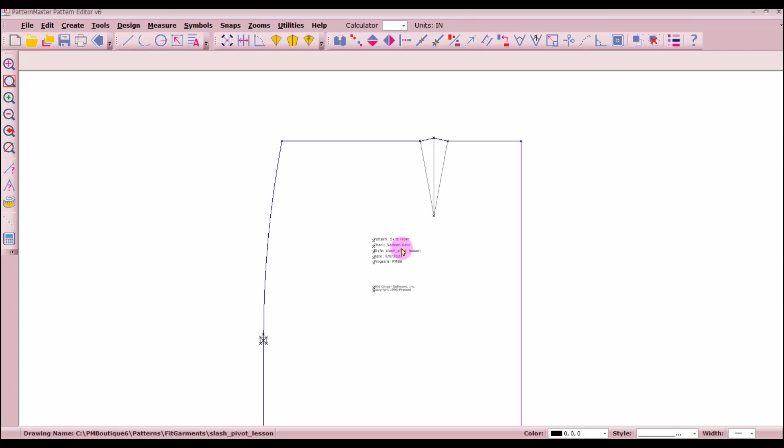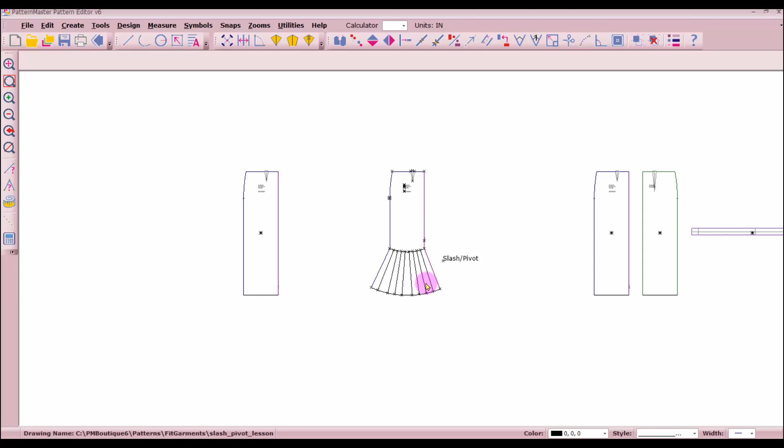Slash and pivot command. This is a midi skirt where I have put a line down at the knee line, and then below the knee I have pivoted, done the slash and pivot command in order to spread this out so it will drape.

So the first thing I need to do here is locate the knee line. On this particular one, it's 24 inches, so I'm going to locate a point 24 inches from the waist. I'll draw a line across from that point, intersect it to the other side, cut the center front at that point, and cut the side seam at that point.

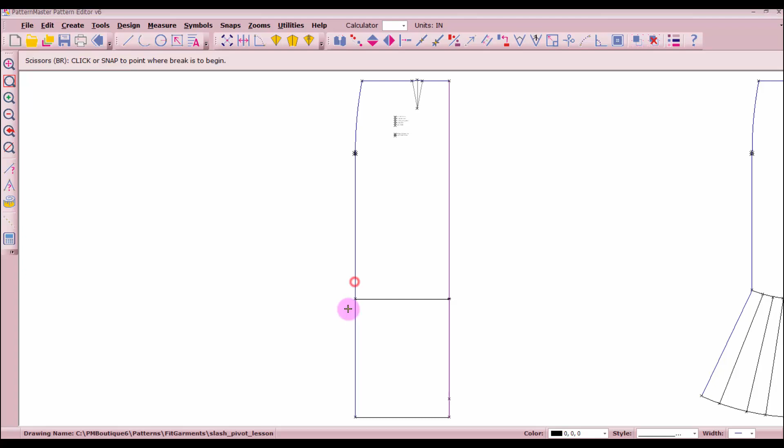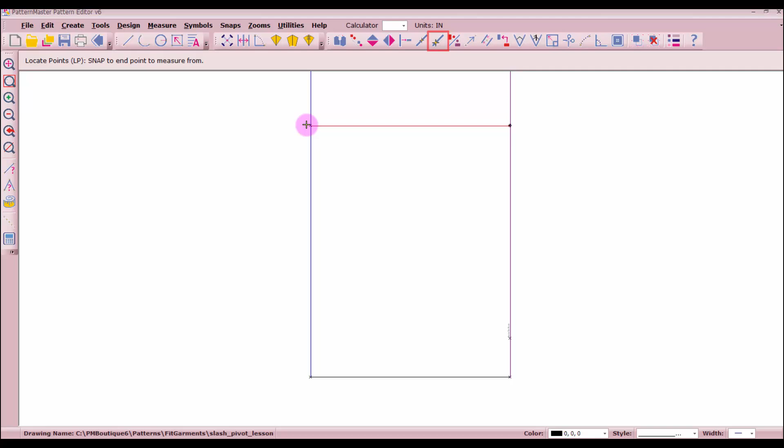The next thing I want to do is place multiple points here. Let me zoom window into here. I'm going to place 8 points along the knee line and along the hem line. Right click at one end of the line, go down here and place 8 points, then come down here and locate 8 points.

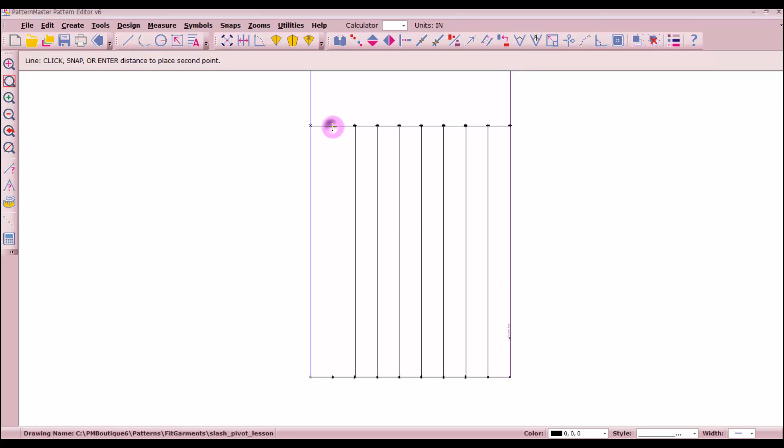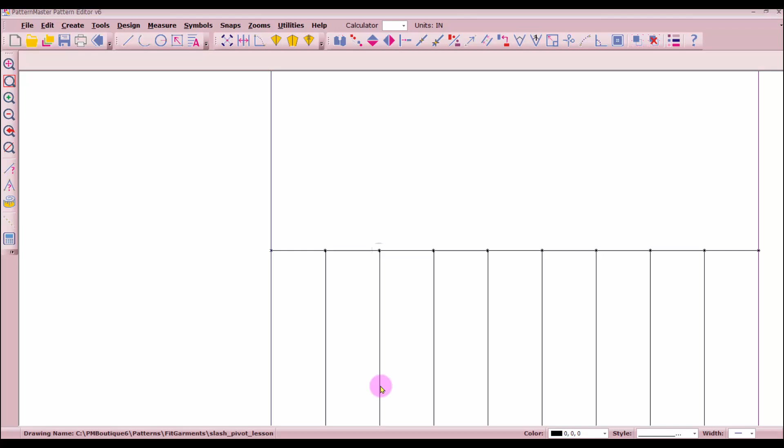Then we're going to draw lines between those points. I just right clicked on each point. Now we need to break this line at each of these points. Click once, double right click. And we need to do the same down here. Click once, double right click.

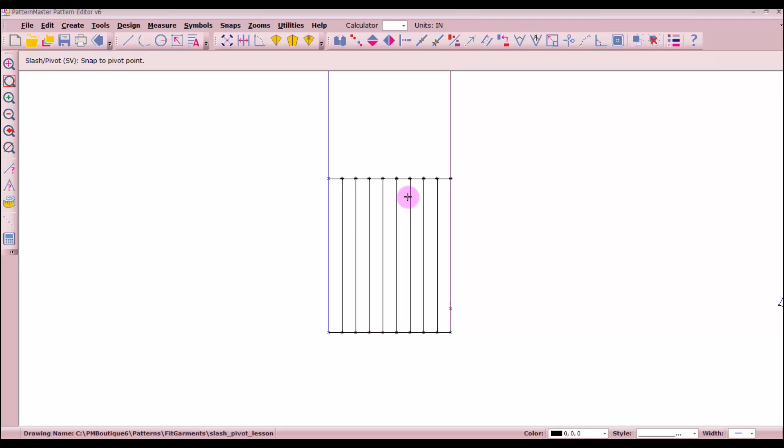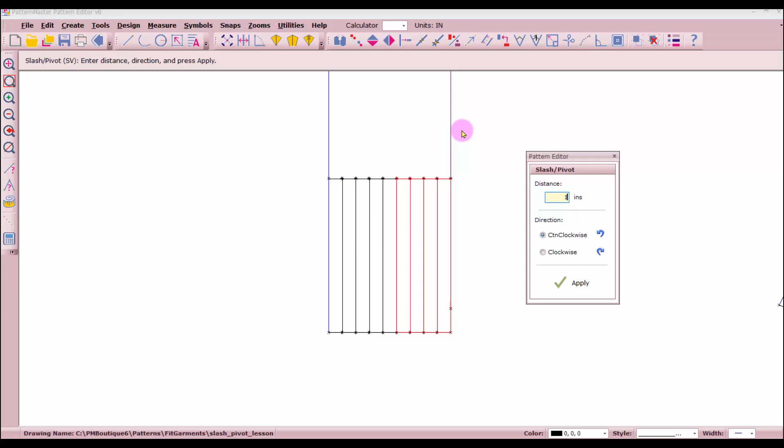And pivot. 1, 2, 3, 4. Right click at the pivot point, right click at the point you want to spread. Drag around all of these. Hit apply. Let's spread them 1 inch, and we're going to rotate to the left, so that's counterclockwise.

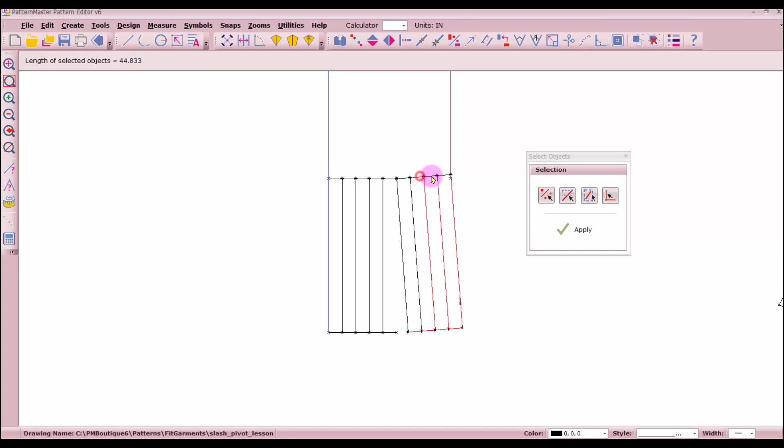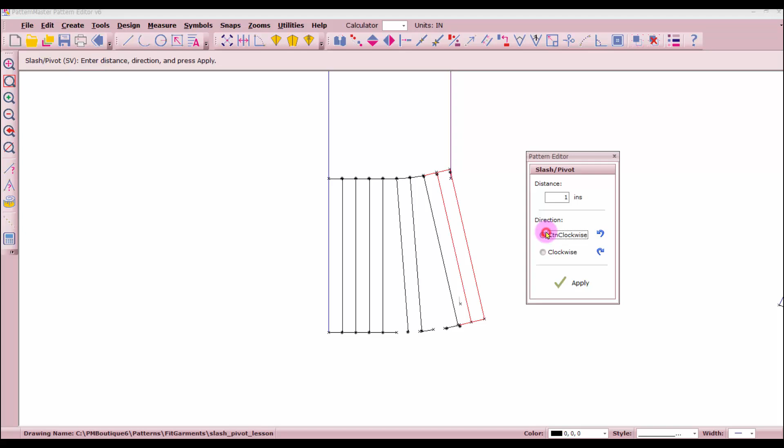Again, 1, 2, 3, third line. 1, 2, 3. And I'm going to select these lines. I'm right clicking at the pivot point and right clicking at the spread point. I'm going to select these two. 1 inch counterclockwise, 1 inch counterclockwise, and then this will be the last one.

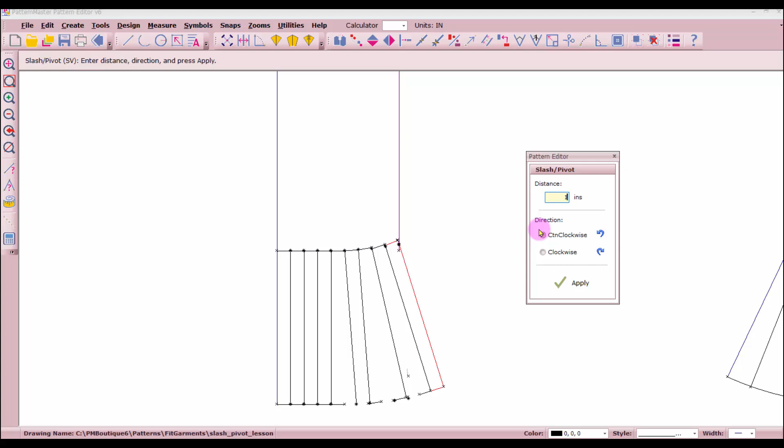Right click, select these. 1 inch counterclockwise. Didn't work, try it again. One inch counterclockwise. And there's that.

Now we need to do this - actually this has been rotated, you can see this space right here. So now we need to do these 4, and we're rotating them clockwise. So this one has been rotated.

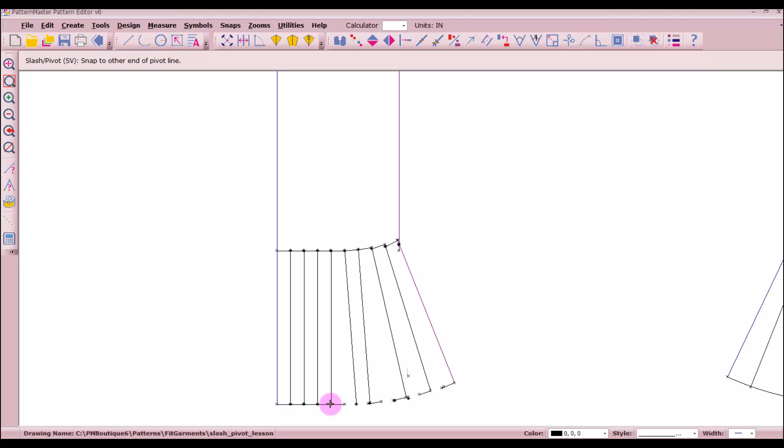We need to start here. Here's the pivot point, and this is the point where we want to spread. I'm going to drag around those, deselect that, and this is 1 inch clockwise.

This for this. Selecting all of these - I'm holding my shift key down to select the multiple objects. 1 inch clockwise. Pivot point, spread point.

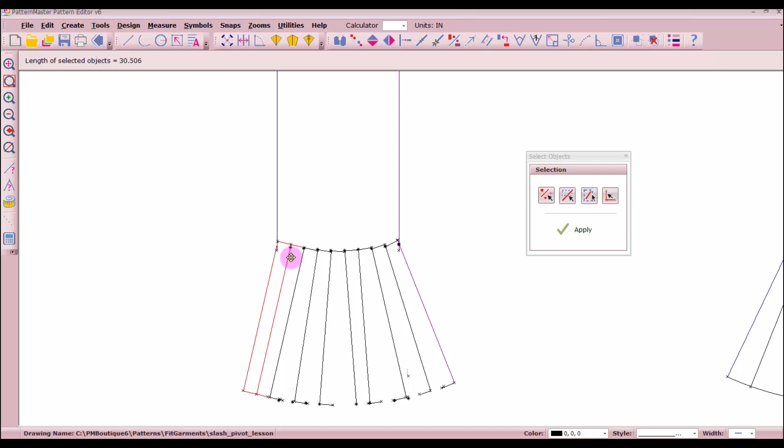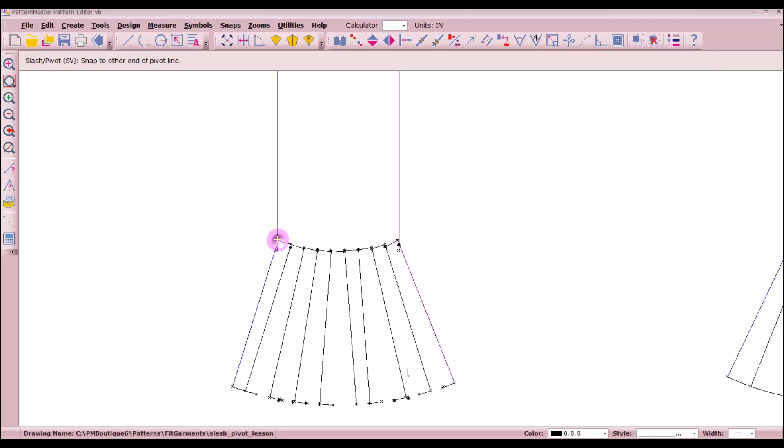Now I will say it really doesn't matter too much if you get these lines up here and down here included in your pivot, because we're going to draw arcs, and we've got other guides that we can use. Then this one is the last one - hold your shift key. 1 inch clockwise. Okay.

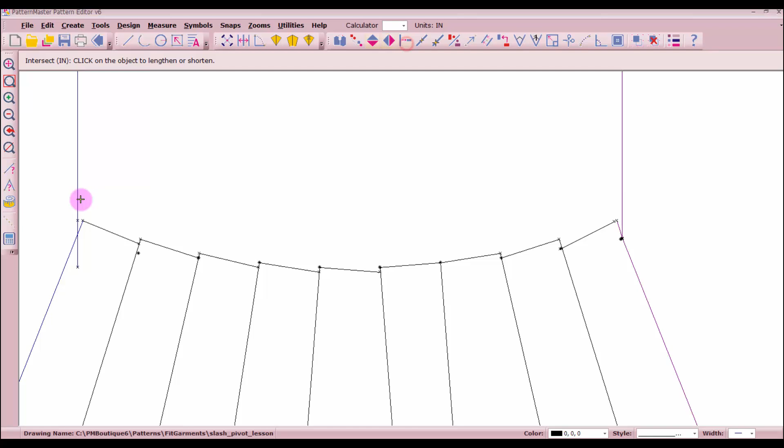Let's do an intersection from here to here, and from here to here. And that can go away. And now let's do an arc, from here to here.

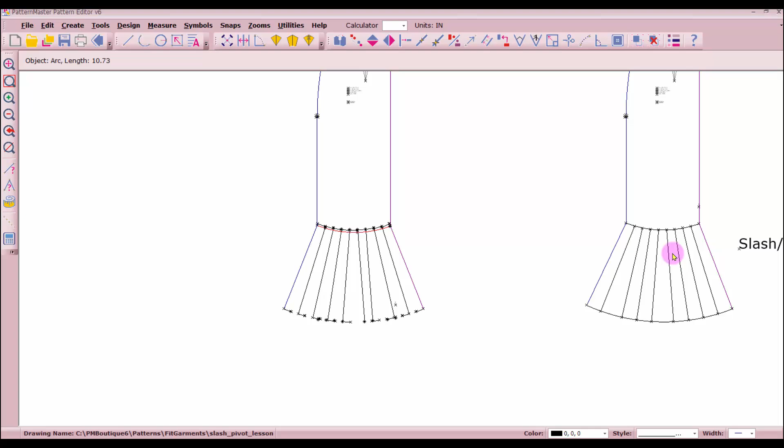I'm just going to kind of - now I know that this needs to be 10.5. No, I need to draw an arc down here first.

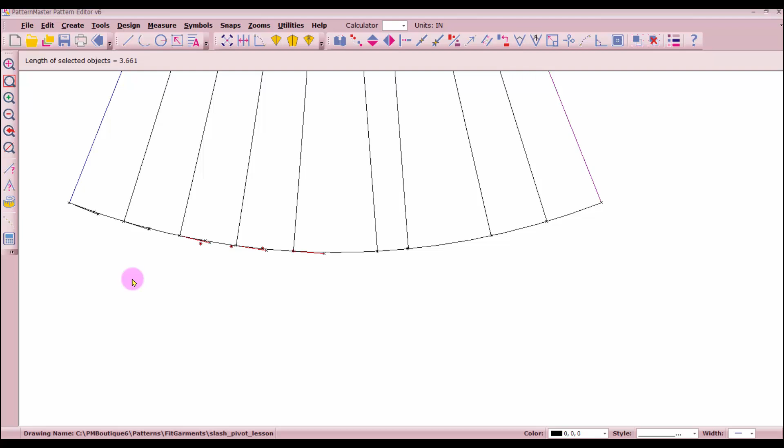Right click, right click. I'm just going to right click down here. I'm going to drag around this and delete. Making sure I don't delete my arc.

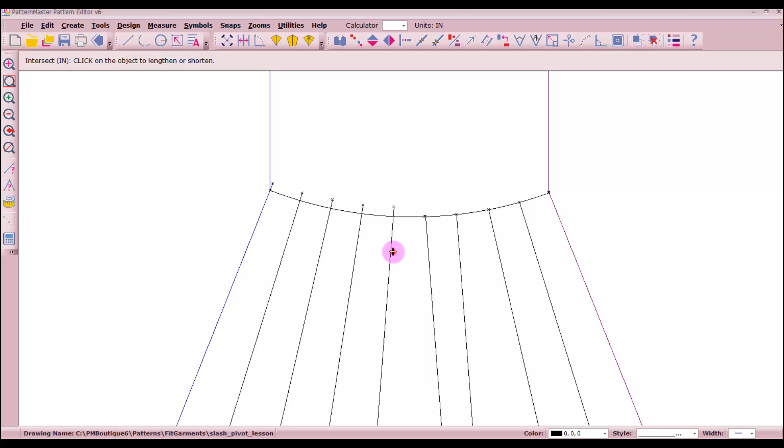Unselect the arc, delete, and then I can just intersect up here, just so we still have lines available for visual inspection. And there we go, so that'll create a nice drape. Now, of course, you won't be able to put the center front on the fold.

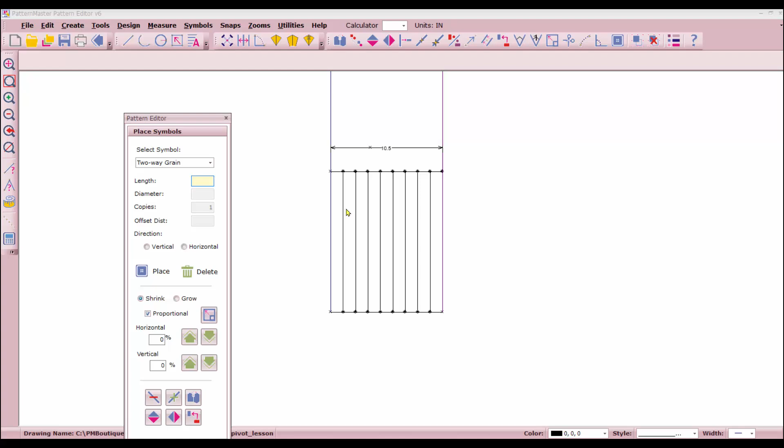Let's look at the grain lines. I'm going to put a two-way grain. We know that this is 10.5 inches, so I'm going to make it 10 inches vertically placed. I need 1, 2, 3, 4, 5, 6, 7, 8 more. So I'm going to zoom window into here.

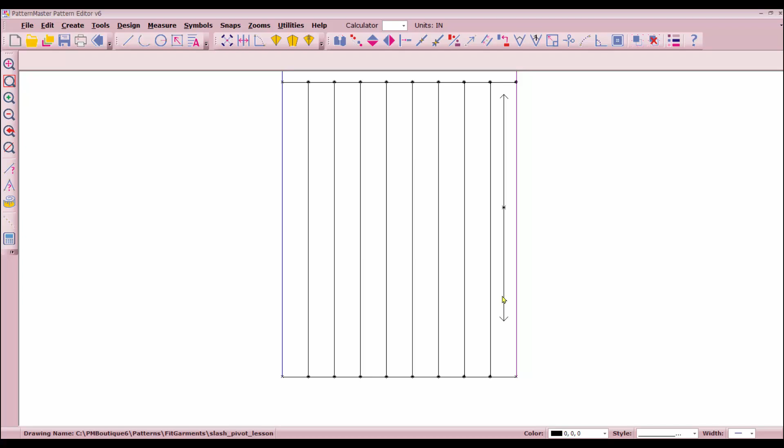Copy, 8 copies, and spread them out. All right, so we've got our grain line.

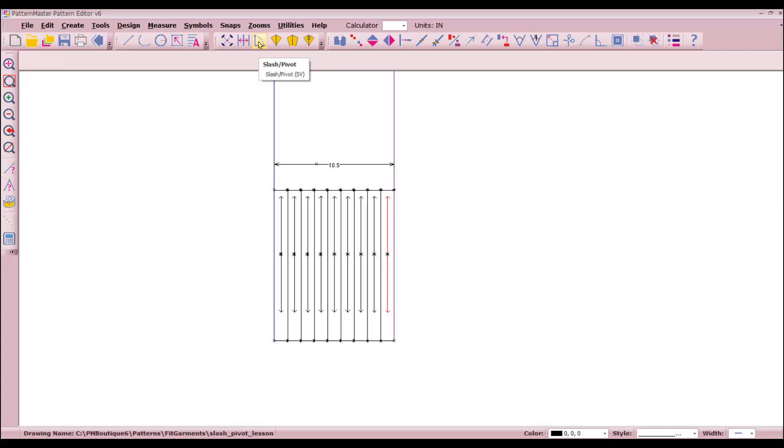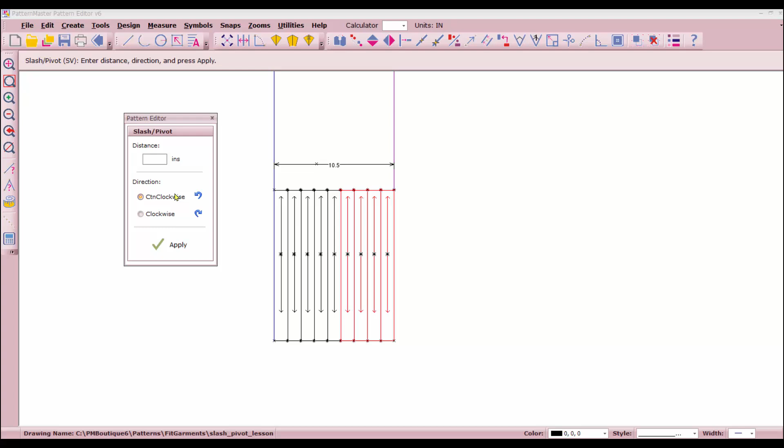Now let's do our slash and pivot with the grain line. So we're going to go from middle, right click at the pivot line, right click below it at the end of the same line. I'm going to drag around all of this - that's including the grain lines. Apply 1 inch counterclockwise.

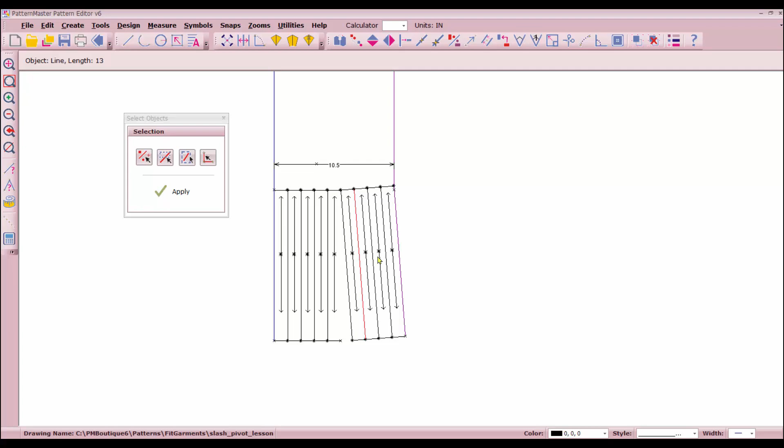This line has been pivoted, so this is our next pivot line. Right-click at the pivot point, right-click on the other end, select that line and everything to its right, including your grain lines. Make sure you're holding your Shift key instead of your Control key. Everything to the right of it.

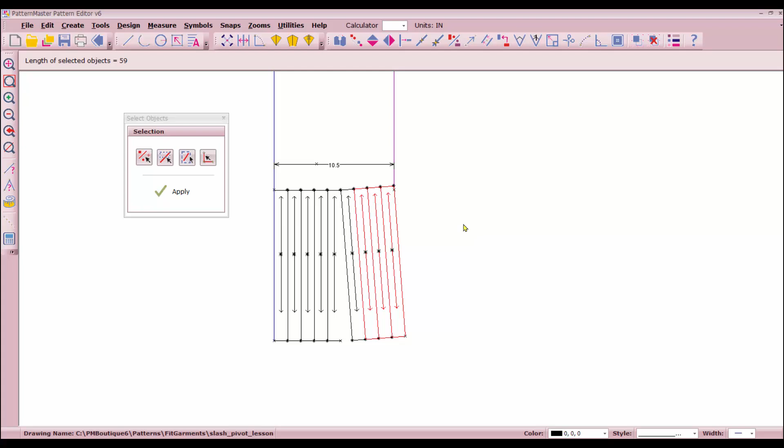This one has been moved, so we're up here. Right-click, right-click, everything to the right. Hold your Shift key, and everything to the right of it. One inch counterclockwise. Now you see how the grain line is starting to tilt?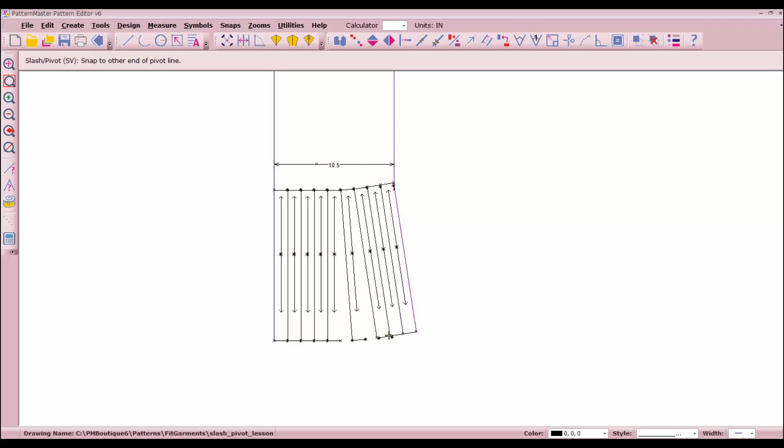This has been moved, that has been moved, this is the next one. Hold your Shift key, select this, all your grain lines, and everything to the right of it. One inch counterclockwise.

These three have been moved, so now it's this guy's turn. That's why I select these little marks down at the bottom, including your grain lines. One inch counterclockwise. So all of that has been moved, and you can see how your grain line has changed.

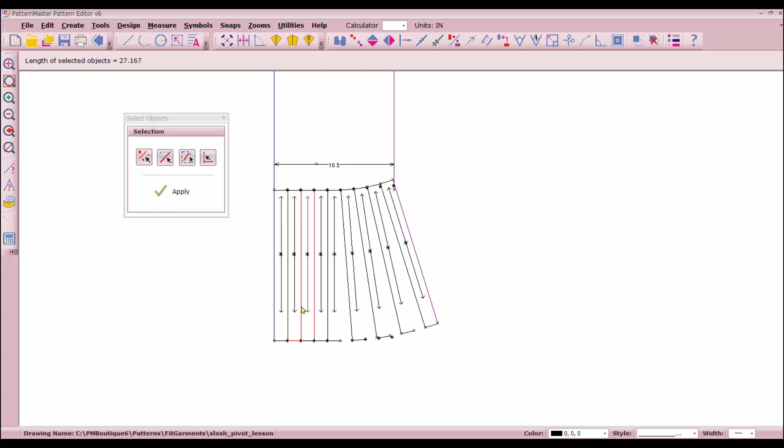Let's go ahead and do the other side. So this guy here is moved, and there's an inch between here, so I'm going to start at this guy. And everything to the left of it. One inch clockwise. This is the next one.

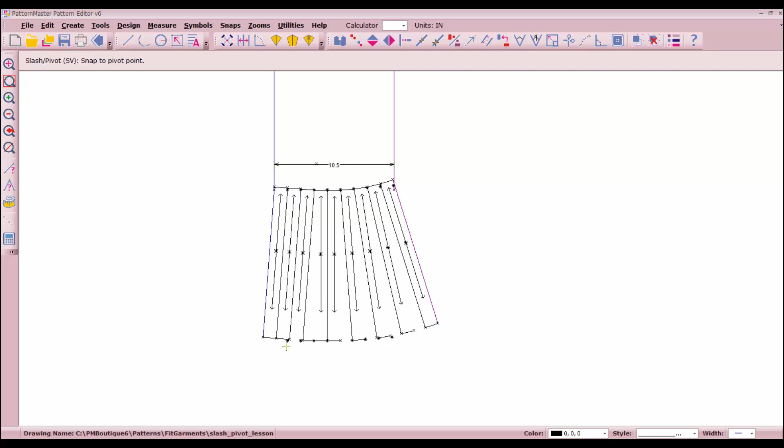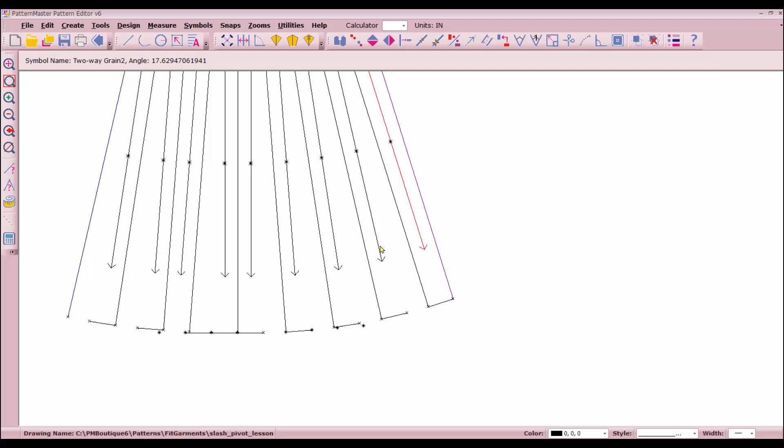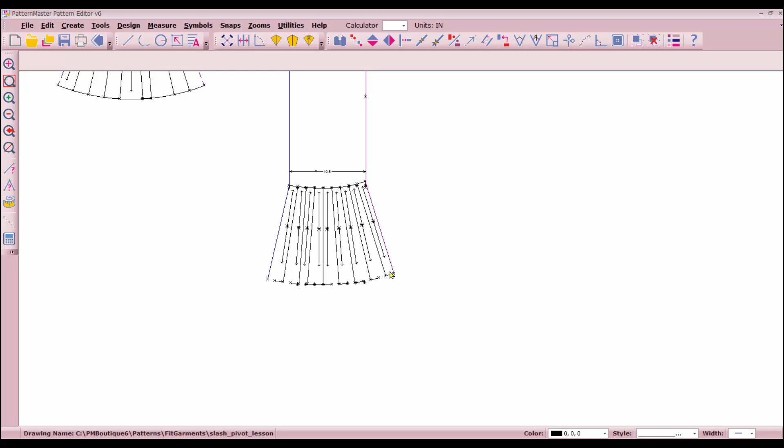And then this one would be moved, so you can see how the grain lines tilt, and that's going to give you your drape. We can get rid of these grain lines. The question is, if you're putting this on the straight grain here in the center, it's going to start being cut on the bias towards the outside edges at the center front and the side seam. But what if you want this to be on the fold on the center front? You can achieve that by creating a circle.

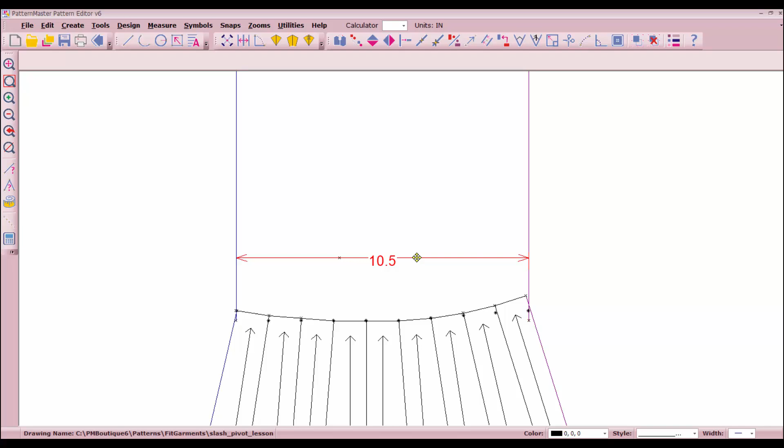Before I started my slash and pivots, I measured the knee line width on the front. That's 10.5 times 2, which is 21. So 10.5 is the number we need to remember.

I'm just going to draw a small circle. Go up to Utilities, Calculate and Scale. This is 7.753, and I want it to be 10.5, 10.5.

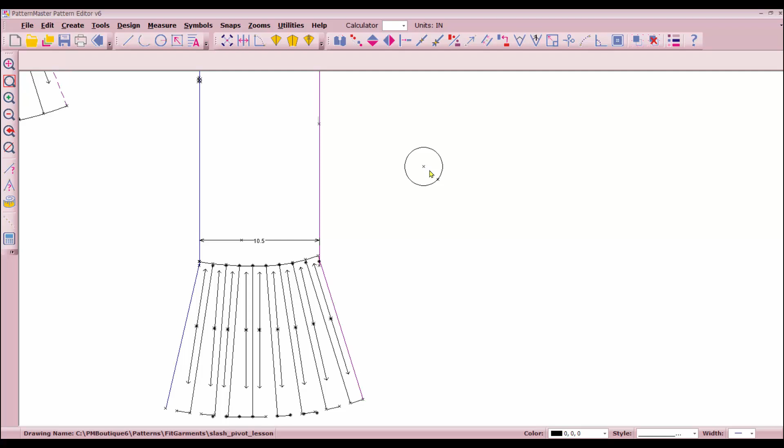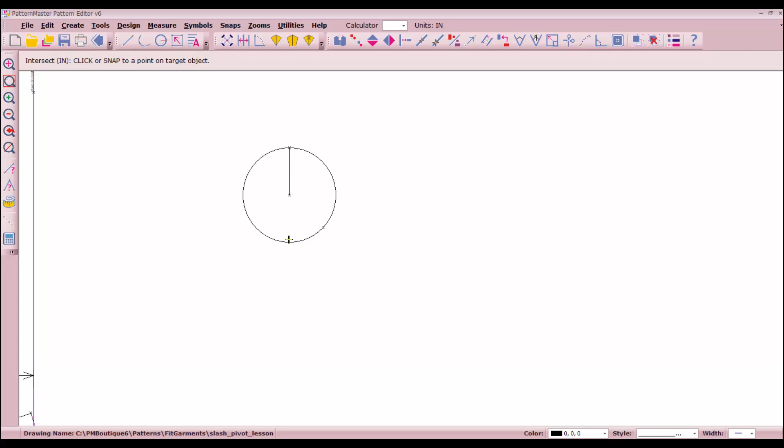We need to draw an X in the center. I'm going to select my line tool, right click at that center point, hold my control key, go all the way up past that, right click, and then intersect here to here, here to here. I'm going to create a copy of this. Click once, click twice, rotate by angle, right click in the center. I want to rotate it 90 degrees.

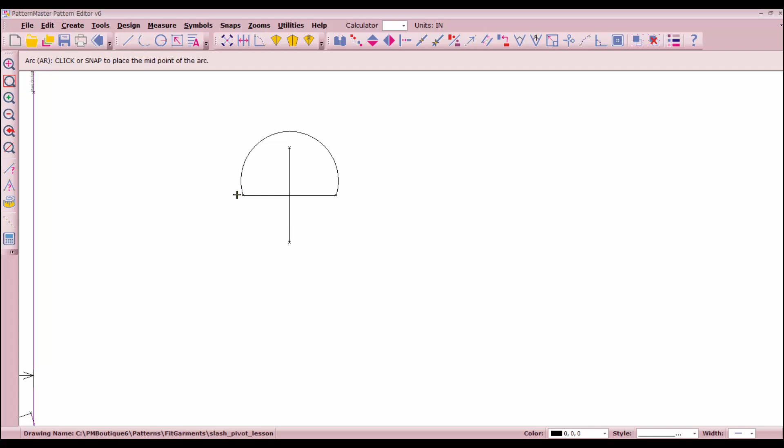Then I'm going to get rid of the circle and draw arcs. I'm going to draw an arc from the center front to the center back, right clicking on each of these points.

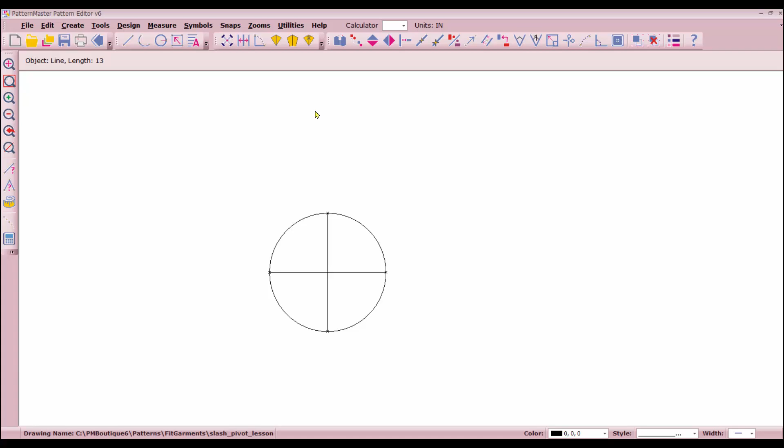Now what I need is a 13-inch length. This was a 13-inch length. So I'm going to draw another line, right click here, hold your control key, drag all the way over, let everything go, do not click your mouse, type in 13 for 13.

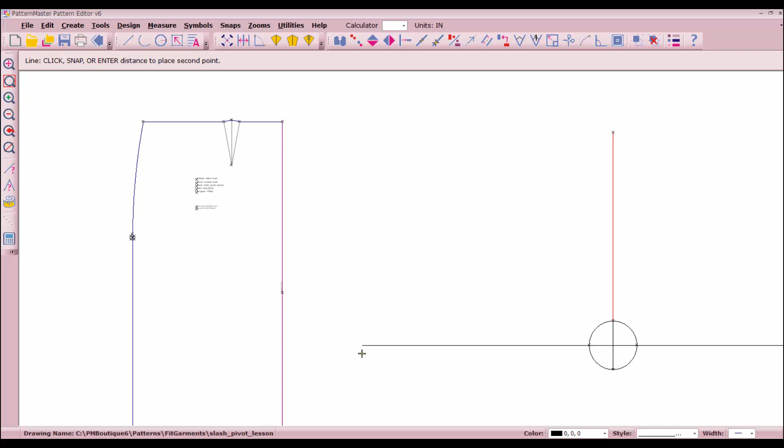Spacebar, repeat. I need to move this over. Spacebar, line, right click, control key down, drag out, let everything go, do not click your mouse, type in 13. Spacebar, right click, control key down, drag down, do not click your mouse, let everything go, type in 13.

So then, when I draw my arc here, right click, and right click in the center. The length is going to stay at 13 inches.

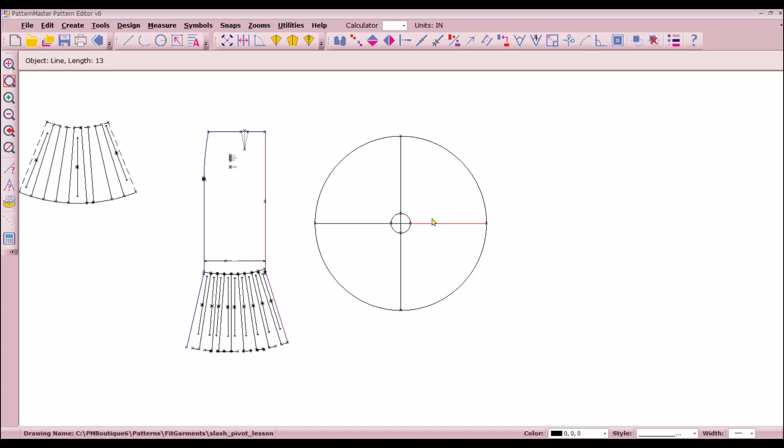Now, in order to get this right here, I'm going to just put some text in. This is the center front. This is going to be the side seam. We'll select that text, copy it over to the other side, and I'm going to select the center front text, copy it to the back, and change it to center back.

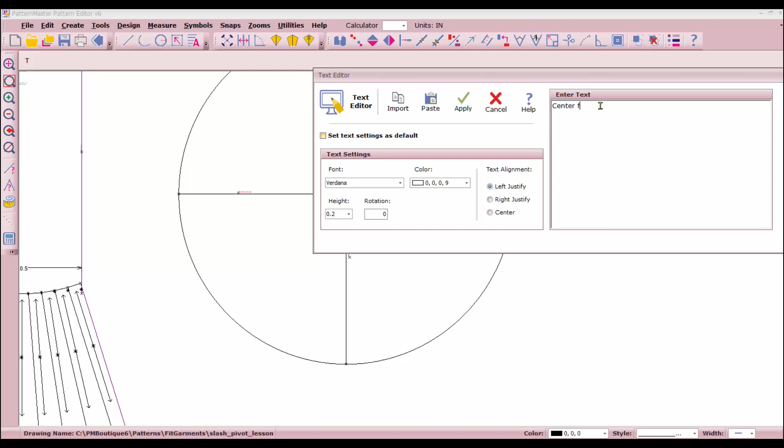So here's the center front. This will be placed on fold. This is the side seam. And then this would be placed on a grain of fabric.

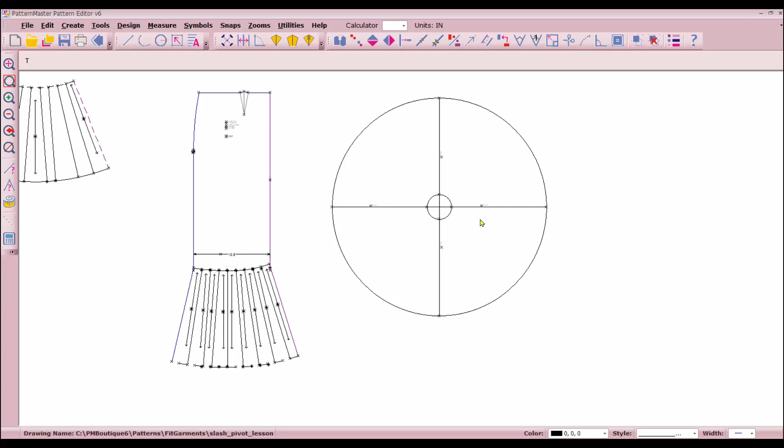So let's go ahead and place our symbol. Place on fold, 10 inches, horizontally. Flip. Actually, I'm going to flip it back.

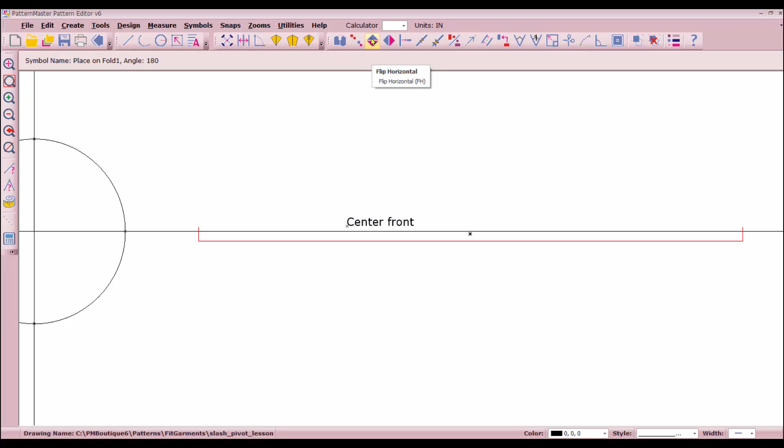Now that we've got the circle done, we need to separate these. If you look here, we need 4 wedges, each 1/4 of the full circle. Since we want to do this on the fold line, I'm going to select everything below this center front. Actually, I'll select everything above the center front.

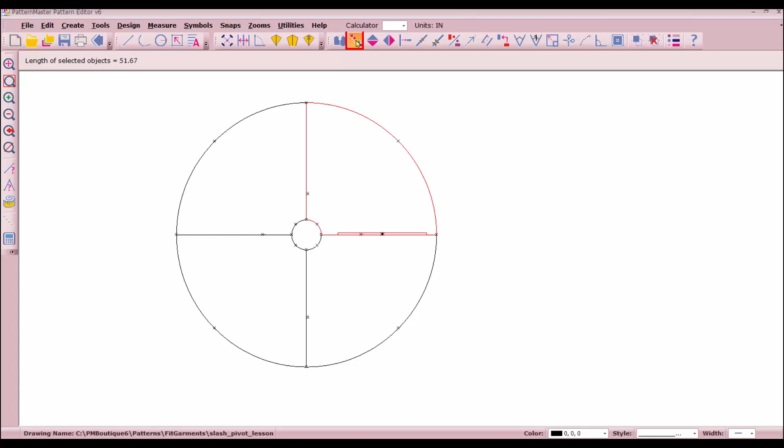I'm just going to select everything connected with this wedge, make a copy. I'm going to put a text object in here.

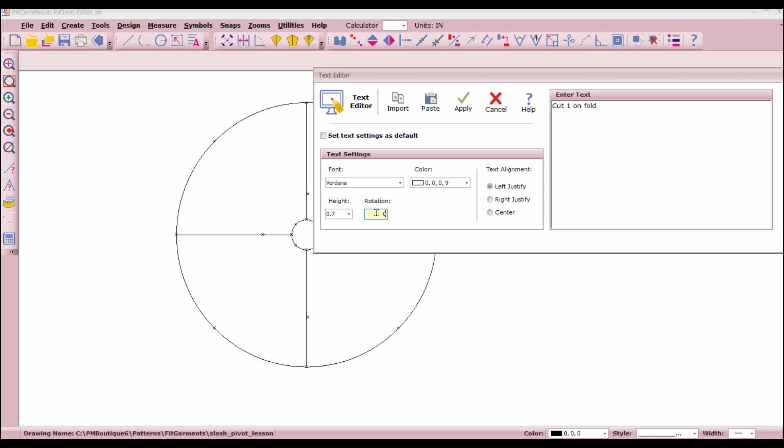So I've got 2 of the wedges here, which is half of this. Now I need to get one more wedge that we're going to cut 2 of. So I'm going to drag around this one. I don't need this, and I don't need that, or this.

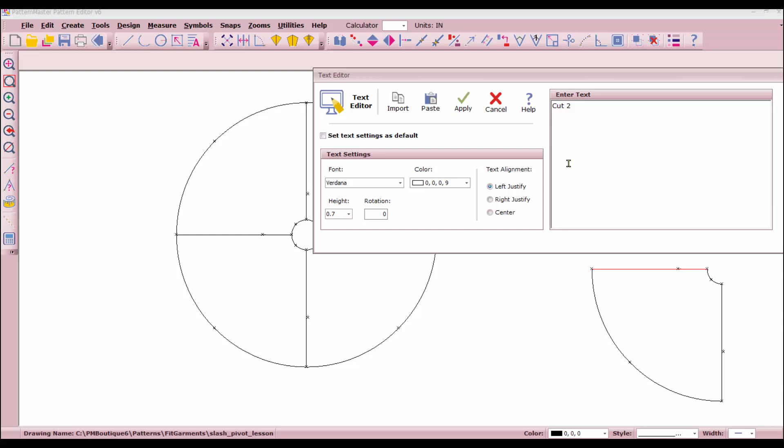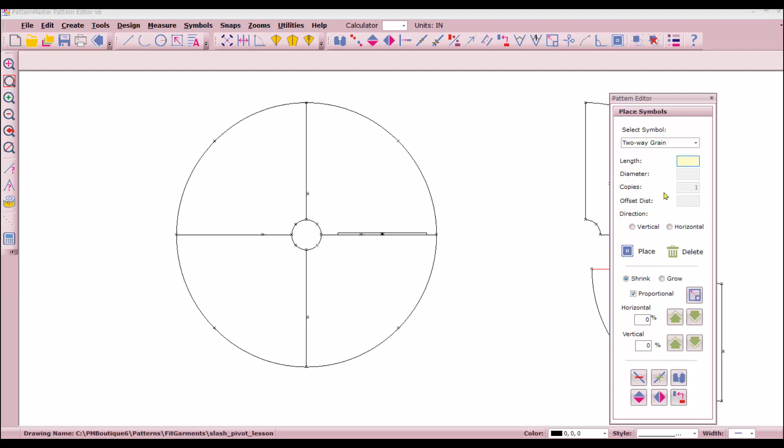All right, so we've cut 2 of these because we're cutting on the fold. So I'm going to cut 2 on this. Now we've got a grain line here. That same grain line will need to be transferred to here. Two-way grain line, 10 inches horizontal.

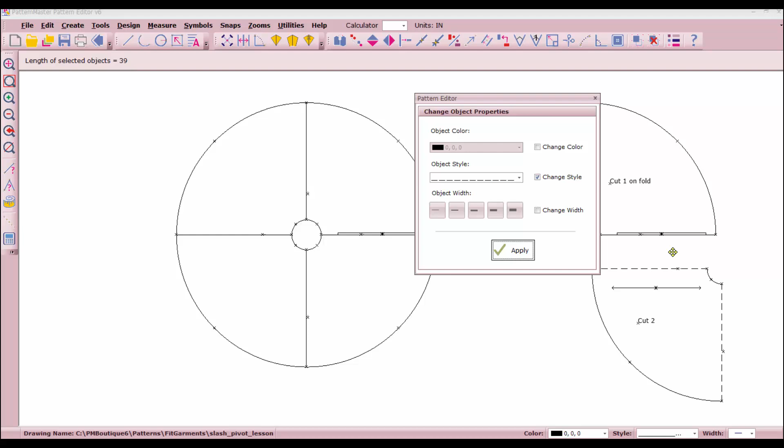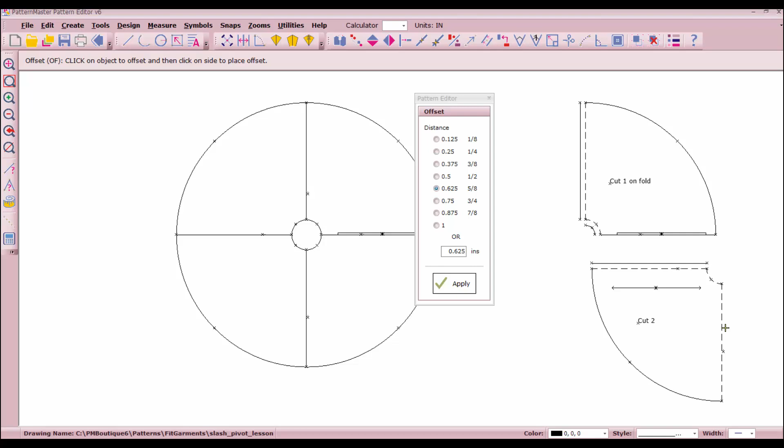Now this and this one and this are going to be changed to dashed stitching line, and so will this arc here. We need to go ahead and offset our stitching lines by 5/8 of an inch. And intersect.

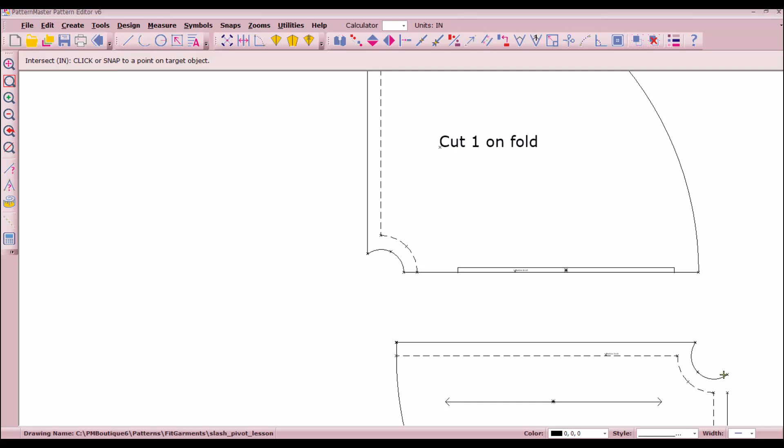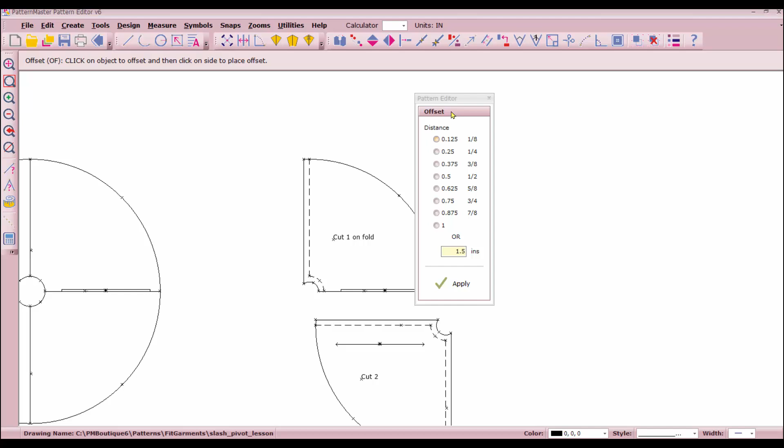And then we need to offset for our hemline. Let's do a 1.5 inch hemline. And intersect again.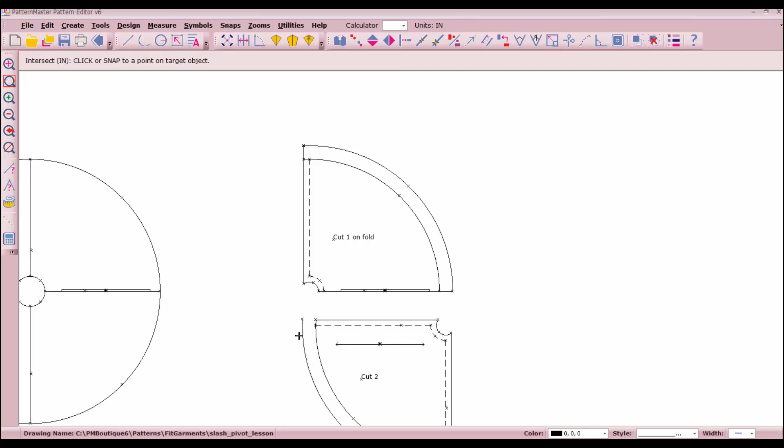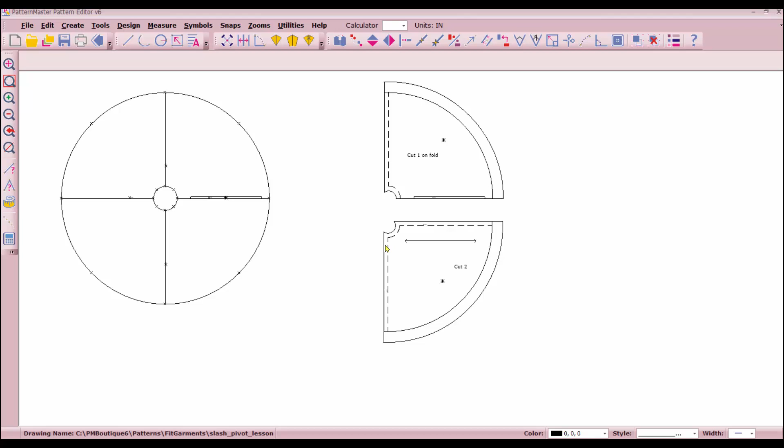So this would be grouped, and that would be grouped. So what's going to end up happening is this is going to be your center front, and this will be on the fold. You will have side seams and a center back seam, which actually corresponds to the patterns.

It will correspond to the patterns because normally on the pattern, this is the back and this is the front. This will be on the center front fold, and then we'll have the fold continuing down to this little flare area. You will have side seams stitched on the front and back. So this is the center back, here's the side seam, and here's the side seam. And then again on the back, you're going to have the center back zipper, which will mean this is the side seam. So you're going to have a flow of continuity.